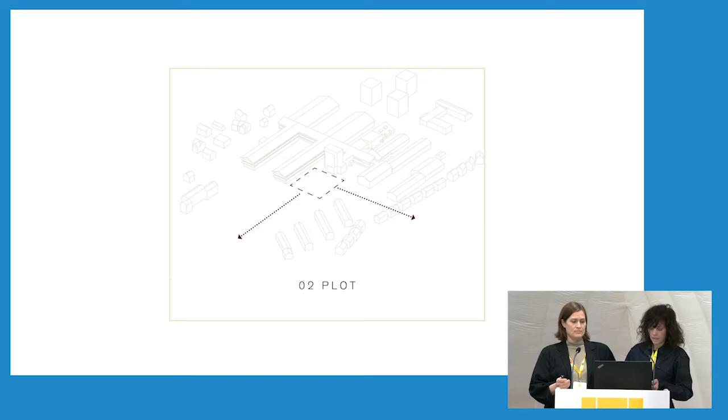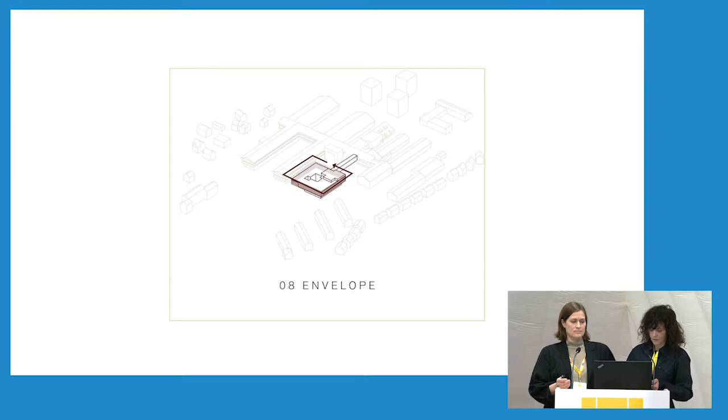The site and the architectural elements we have used are based on views, adaptation to scale, connecting, optimizing, bringing daylight, composing, wrapping, and the transition between landscape and architecture in its context.

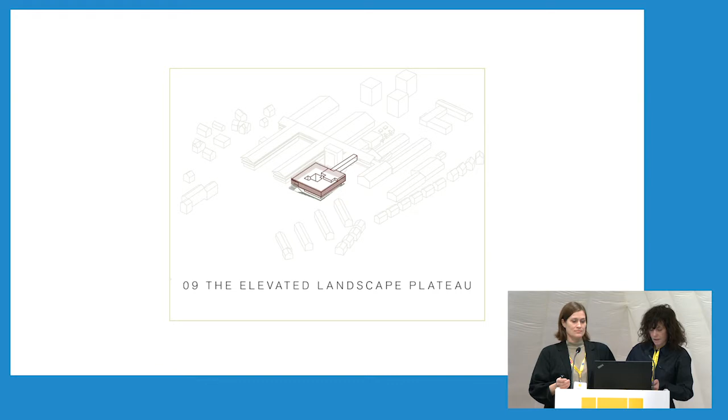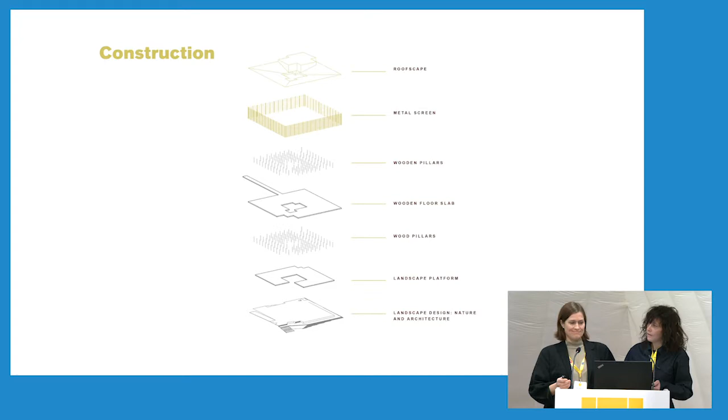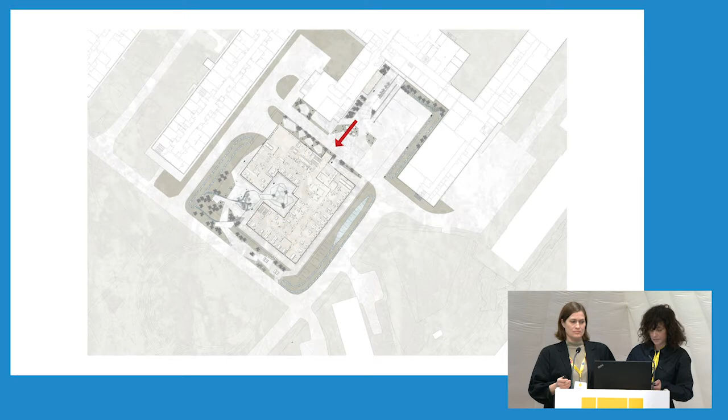The building structure is a hybrid wood structure, landing on a concrete base wrapped in a metal screen, with a flexible plan for different users. The main entrance has a clear orientation and is facing towards the common sauna plaza. The elevated section creates a variety of spaces, both outside and inside.

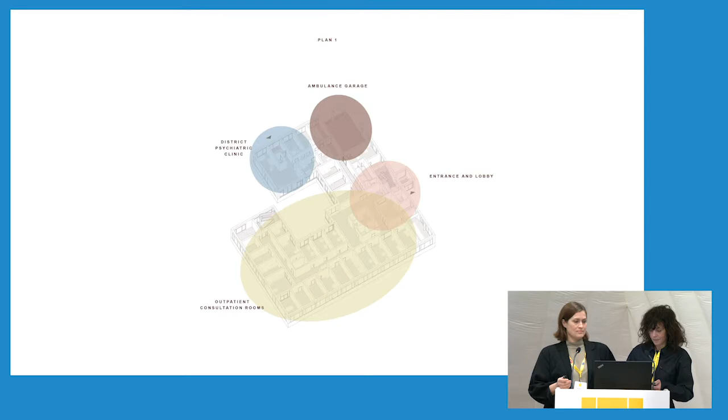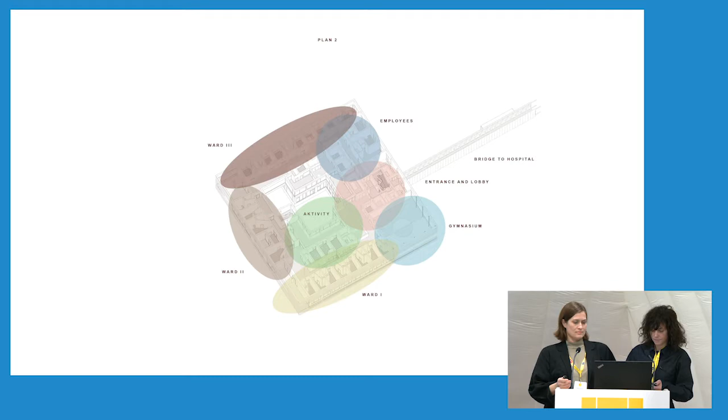The overall program on both the first and second floor is organized on a basic 3.6 grid in a 3,600 square meter building, carrying both a specific architectural answer and flexibility towards the future. The looped form creates a circular movement and delivers an efficient workflow, and also the flexibility needed within the ward.

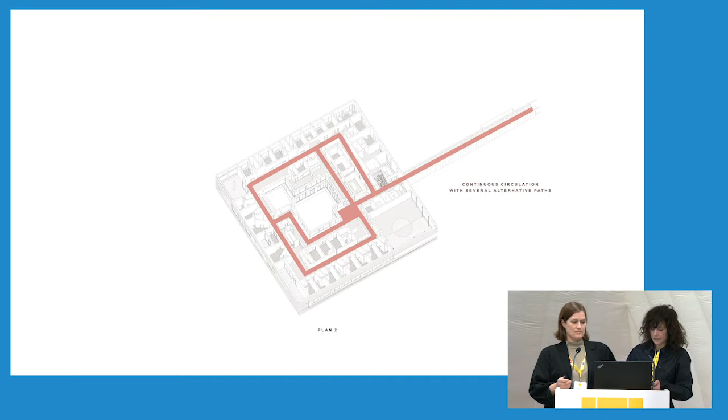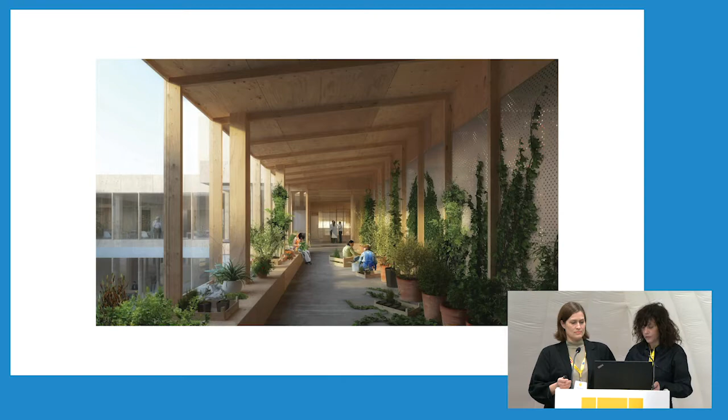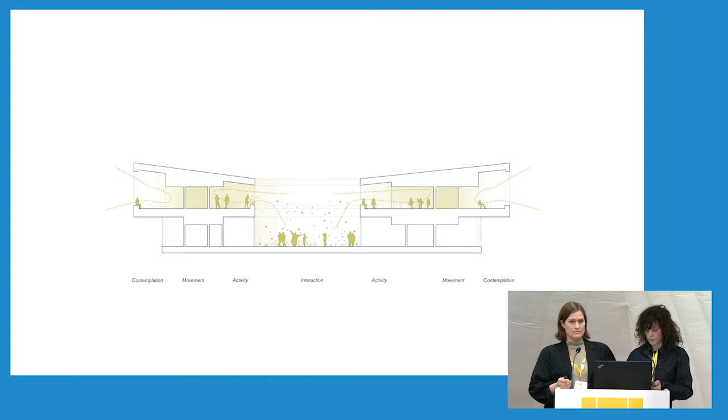The non-corridor ward offers a variation of common zones and spaces for activity in close connection to landscape and views. The section works from active and interactive spaces situated central in the building, and fades out towards the private rooms and a more contemplative atmosphere.

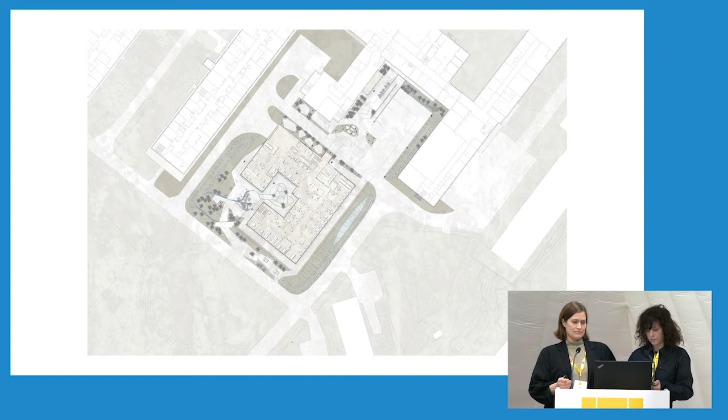Nature and climate bring quality into the heart of the architecture. The open water system, the central blue heart, collects water and lets the light play and reflect on the water surface deep into the building. At the same time, we solve the huge amount of water from ice, snow, rain, and everything at the same time.

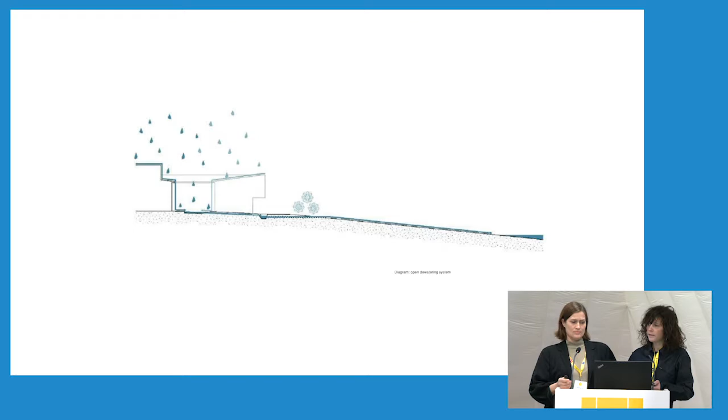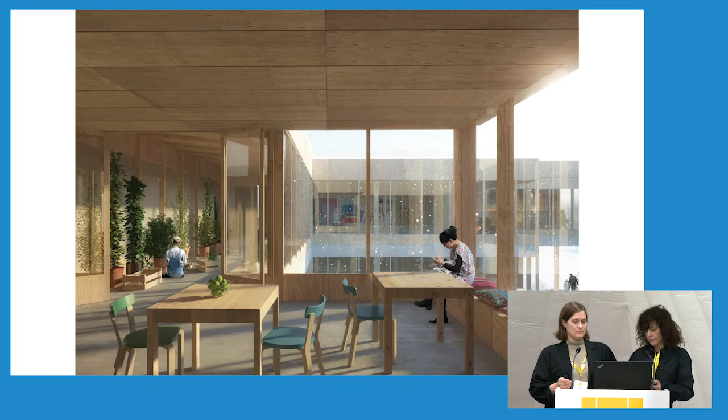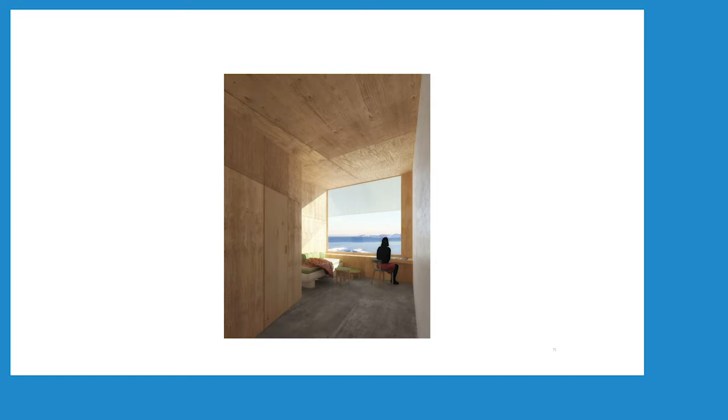Materials and colors are inspired by the Greenlandic landscape and the special light, and are composed in a rustic environment consisting of a wood frame structure landing on a soft and warm concrete floor, both in the common spaces and the different rooms, with patient rooms facing the fjord. Local craftsmanship has been an inspiration in the detailing of the building.

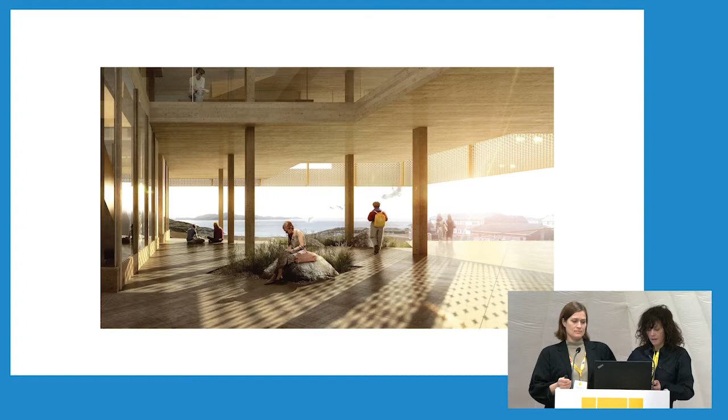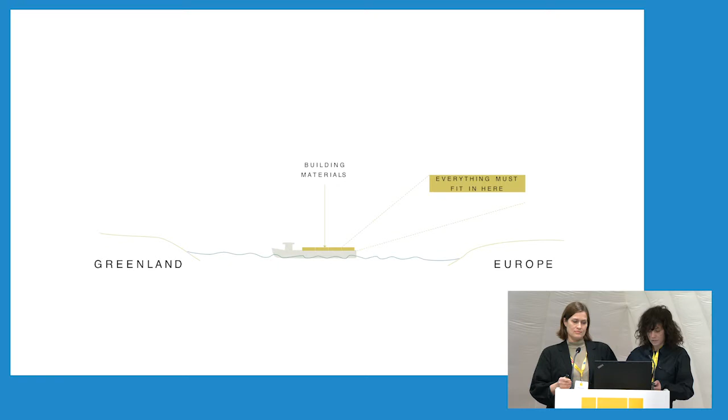In the Future Health project in Nuuk, it's not about an iconic landmark. It's not about us as architects. It's about dealing with the unique conditions. It's about best practice. It's about bringing the essence of the different challenges, various needs, and letting life come to live in an architectural answer, in an architecture framing a trustworthy, safe, and brave environment.

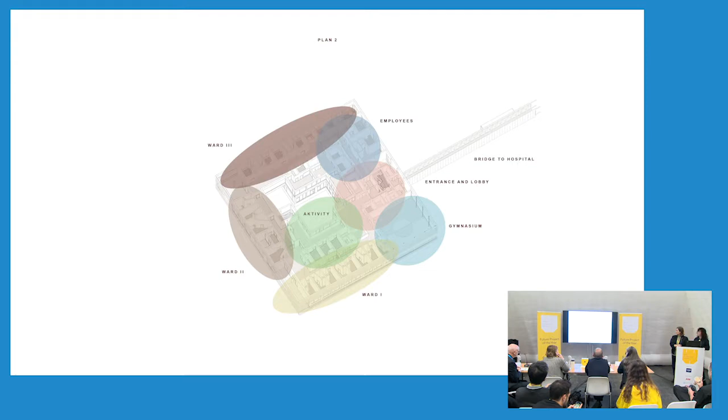We have worked with a clinic that needs to take care of all sorts of patients, all from children to victims from rape to the rapist. So it's been really important for us to create a plan that can appear in sections within the building, because this small building needs to take care of all this. Normally you build one specific ward for one special sickness in normal cases. But here we had to take care of both a daycare center, caring for kids and children, and also all kinds of sickness within this building. It's been a process where we have worked with this plan where you can actually divide the ward and let the different needs grow within this circle movement. It's also based on the idea that the patient should be able to move around and never meet a dead end.

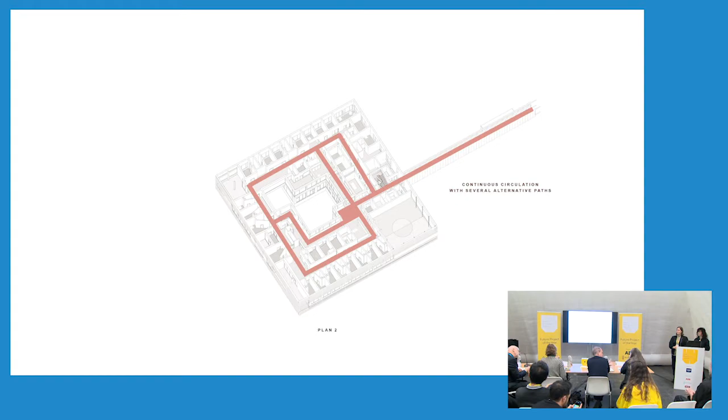I think my friends that live in Finland and in the Nordic countries all tell me that they go crazy because of the weather, because it's always dark. All your presentation has shown us the light. How do you deal with the darkness in that area?

Within the building we have a dynamic light situation, so it follows the daylight conditions also on the inside of the building and follows the routines of the ward. It's a solution where they can decide when and where it should be brought down to more of a nighttime feel within the ward. So it's a technical solution with this dynamic light. And also in Nuuk, they have large amounts of polar lights at night, so the facades and the openness to the sea will also invite the polar light in.

Yeah, so let's advance because we're running towards the end of time. We had a school earlier, and they were talking about the school, as well as the teacher and the pupils being part of education. If we take this building, you've got the clinicians, and you've got the building—building on Francine's point, how is the building assisting the process? And to focus that tight: if you were to just say one innovation in the program or planning of this building, one innovation that's gone beyond any other building of this type before, what is that?

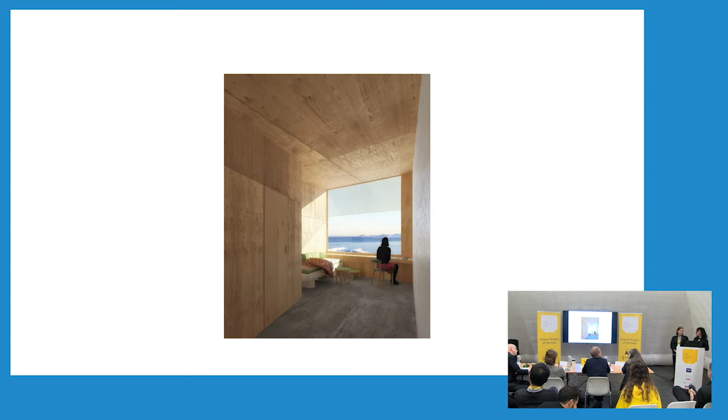Actually, we still have time for one more question, if any. I mean, for me, I was a bit curious because I think often what goes on in these facilities, maybe people don't want to be exposed to the outside, but it looks very glassy. How do you manage the privacy of the patients with such a transparent building?

Yeah, we have divided the programs. The daycare center is on the first floor, and on the second floor we have the more protected area with all the wards, so it's taken care of in the section.